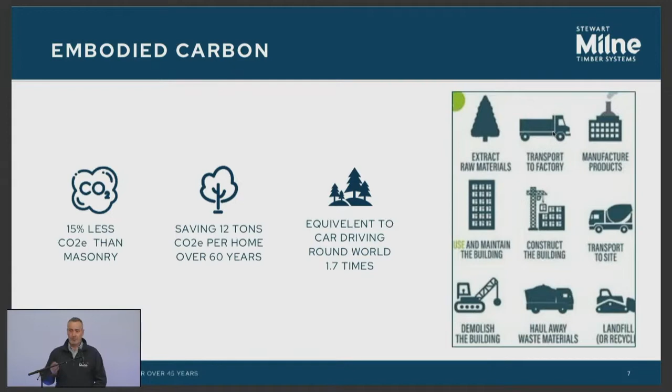Now, we're going to build 300,000 houses in the UK. Currently, the timber frame market is about 60,000 homes. If that doubles to 120,000 homes, that's 120,000 times 1.7 times around the world of carbon saving into the atmosphere. That's a great story. And businesses are looking for solutions in terms of how they can actually reduce their carbon footprint.

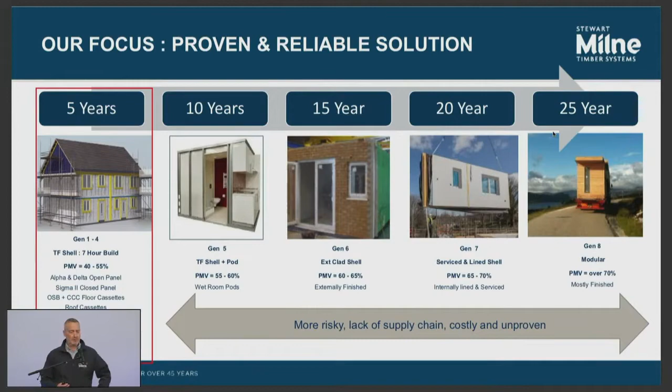Our focus has been on the structural shell. We're a panelised timber frame supplier. We do not produce modular systems like the one on display here. We are panelised MMC systems. Our focus is on building a structural shell, wind and watertight, insulated, windows fitted, pre-finished floor, roof on the deck, no scaffolding, roof tiled in less than 7 hours. So the structural shell, complete, wind and watertight in a day.

That then allows the follow-on trades to come in, fit the kitchen, fit the bathrooms, complete the home, and then clad the building around the outside with traditional materials, be that stone, block, render or brickwork. You can get a mortgage, NHBC love us, banks love us, lenders love us, because you can get a mortgage. It's a sustainable, renewable material, but also proven with a heritage of acceptability in the marketplace. It's on the cusp of being a mainstream solution.

Yes, there's things we are looking to do in the future. So working with AMCH and the Innovation Centre here, looking to think about pod and panels. So if we dropped in a bathroom pod as part of the shell process, if we did other things as part of the build, maybe putting a facade in the factory, for example, we could increase the amount of off-site manufacturing to a position maybe in 5, 10, 20, 30 years, where the majority of the home is done in the factory. But if you want a here and now solution for reducing your carbon footprint and delivering a viable, cost-effective, mainstream, acceptable way, timber frame is the way to go.

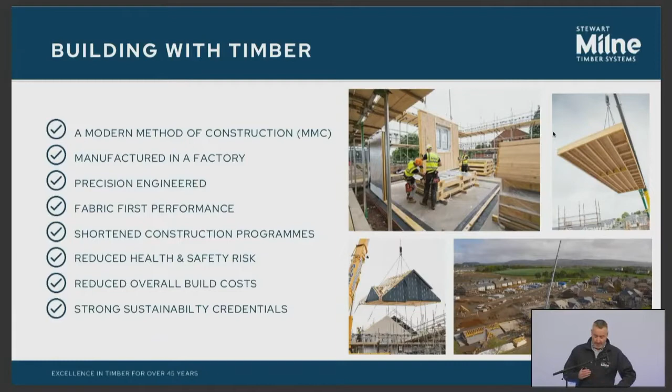And also, if you look forward to what the government's doing, the next slide, we see in England a move towards more modern methods of construction. Homes England fund all affordable homes in England currently. Huge landowner, huge funder. They've now encouraged, as part of their funding criteria, that all funding released in England for affordable housing requires a 25% MMC requirement. MMC is defined as 7 categories. Category 2 is panelised timber frame, and it has to have a pre-manufactured value of 55%. Pre-manufactured means the volume of work done in the factory versus the volume of work done on site. That's driving the market towards adopting these systems.

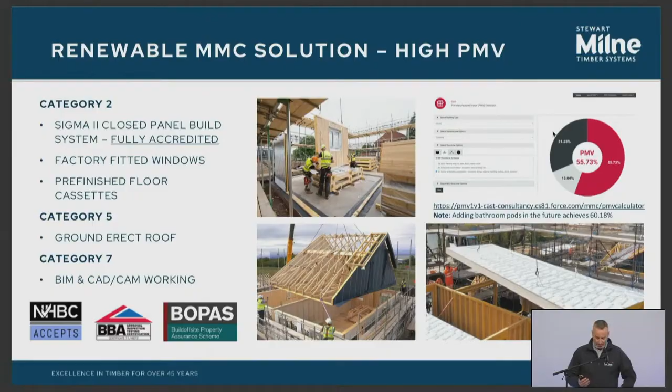I would call on the Scottish Government to think about doing something similar. Even though we currently use 85% timber frame, we need to develop the next generation timber frame, including closed panels, other incremental improvements that we can make from an indigenous supply chain that can service our existing marketplace. And also, these systems that we're developing, closed panel technology that is the sort of mainstay of achieving 55%, needs to be certified and approved.

The question was asked earlier today. We've got BOPAS, we've had it for 5 years. We've got BBA certification, we've got NHBC accepts approval in our systems. We can get a mortgage, you can get insurance. We've got durability assessments for at least 60 years. Everything's designed for a minimum design life of 60 years. So that means that banks can support us, mortgages can be given, insurance can be provided on the homes that we're producing. And that de-risks any concerns that a developer or a housing association may have with their housing stock. It's really important we have these certification schemes in place and that people adopt them and use them.

PMV, the question was asked, pre-manufactured value. It's a new term. It's like all these things. But write it down, because I'm pretty sure people will start to get their head around what that actually means to them. And if you're a developer or if you're an affordable provider, whether you're a small SME or a large builder, you'll start to be asked questions about what your PMV score is for your development. And that's essentially a driver towards modern methods off-site construction systems. England have started that journey by specifying a metric. Scotland have yet to do so, but are likely to do so, I believe.

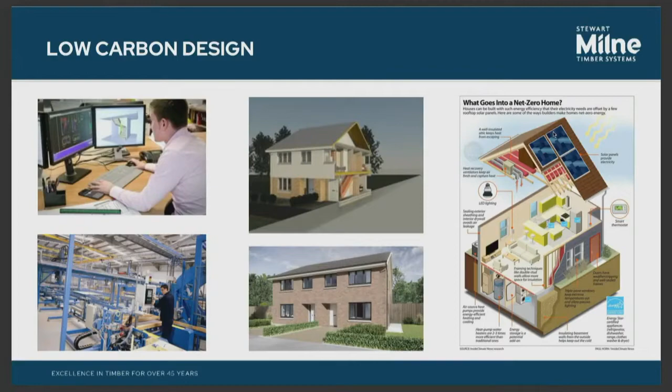So things like Revit technology that's from Autodesk, to actually use that and to then create that information to then flow into the factories so that our factories can be efficient to produce product, and flow into the building site so that the guys on the site have got information at the point of use, makes their life easy to assemble the homes.

And also embracing manufacturing. Timber frame is a low energy manufacturing system. It does not use energy. We're about to design some PV arrays in our factory in Witney in Oxfordshire, a 3,000 unit PV array, which will actually mean we produce more power than we consume. We will be self-sufficient as a factory.

So all our equipment, all our forklifts, and all our potential customers and our staff coming to work have the ability to potentially charge our car and actually run our equipment. We can use our waste heat, our waste timbers, to create heat and then decarbonise, obviously, the outputs, the emissions, to create heat as well. Or we can actually, in the future, look to battery storage.

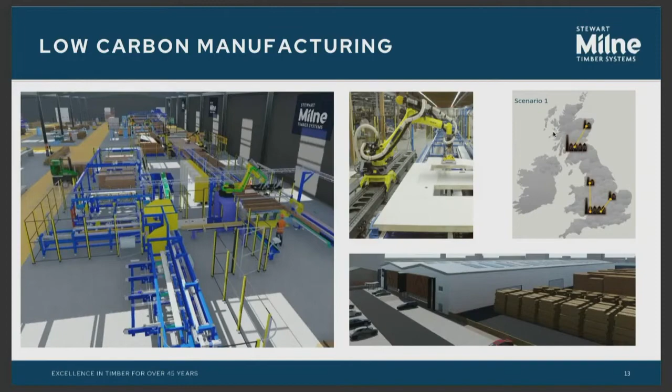We are creating high-value jobs that will ensure we've got a more diverse, younger workforce who want to come and work with us. We can't have factories where we're relying on people lifting heavy things and assembling heavy things. We need to move towards how the car industry have operated. We're on that journey. That technology could be deployed into Scotland in due course when the PMV number increases to a more developed product. We're developing that technology. That is world leading.

And the last thing we've done is create digital twins. So we think a hub and spoke factory design is a good system so that local jobs can be created. We've developed a hub, which is a large manual or automated hub that produces 5,000 homes, or a spoke, which is a smaller 2,500 unit manually orientated spoke.

Done this with the Manufacturing Technology Centre, working with the Construction Scotland Innovation Centre and AMCH to create digital twins of future factories that we can deploy. So if we've got a pipeline of work in a certain location, we can actually have a pop-up factory to make product close to that site.

But it's also about the construction as well. So, reducing emissions. If we do more in the factory, so insulate things, put the window in, have pre-finished floors, we don't need so many trucks coming to our site. We don't need so many forklifts running about our sites. We're a safer way to build. We're not working at height. We've got less trips and falls. We've got less manual handling.

What we're seeing in the mainstream, and the opportunity, is that in blockwork construction, brick and block, you rely on a bricklayer. There ain't many bricklayers going around. They're actually a depleting resource over time. They're an aging workforce that's reducing. We need new ways to do it. So timber frame allows us to do that by taking that element off it.

We still need a bricklayer to then put the bricks round about it. So he's more efficient. He can do 5 or 6 houses a week rather than 3 or 4. He's not having to lift heavy steel lintels or lift heavy block lintels because the shell's there. He's building to a template.

So in terms of getting more people and de-skilling the process, it's about using the skills we've got, extending the shelf life of the workforce we've got, and actually encouraging new people into it where they don't have to work on a muddy field as much because half the building is already built for them.

So our final roadmap is about low carbon homes and designing those. So through our project, AIMCH, working with our partners, we've developed a pre-configured book of affordable homes that are net zero carbon, 18 house types, all designed to Housing for Varying Needs, or NDSS standards in England. Fabric first, heat pump ready, with a low U-value external wall solution, 55% PMV as minimum, all type approved, and

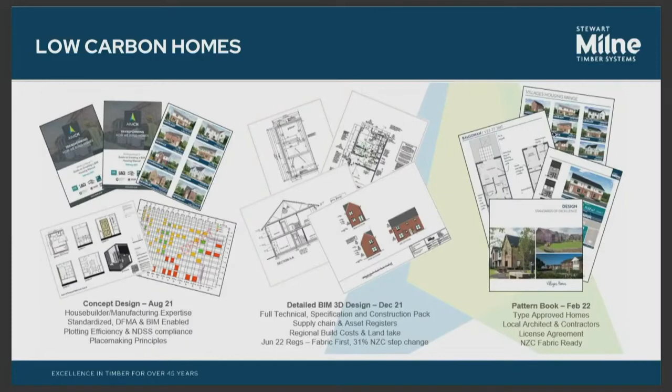free to use. So an SME who doesn't have the skills, who doesn't have the technical people to help them, can actually come and just use, under a license agreement, our range of house types, with a regional architect who can then build them, whether it's in rural Highlands of Scotland or whether it's in the outskirts of London. Configure them together, elevate them to suit the materials in that local vernacular.

We've got a placemaking manual that goes with it to ensure that the places we're building are fit for purpose, 3 elevational styles, and are already type approved by NHBC, endorsed by, hopefully, Homes England in terms of funding, and potentially supported by Lloyds Banking Group in terms of development finance and mortgage finance.

Those are the type of solutions, pattern book, standardisation, DFMA, that make our life a lot easier. Makes the developer's life a lot easier where they've got an off-the-shelf pre-configured solution. So first to market, spring next year, we'll have a solution for those who'd be interested, where they actually can just take the whole house solution from us, because we are a developer as well as a supplier.

And finally, just to talk about our ambitions as a developer, we are currently building the largest residential development in Scotland at Countesswells on the outskirts of Aberdeen. It's a 3,500 unit development with mixed use, education, community, food production, retail, and the largest public park built in Scotland in the last 100 years. A huge degree of biodiversity involved. We call it a 20-minute neighbourhood to get connectivity to wider connections within the Aberdeen area. And we believe this can be really a bedrock for the future model for net zero carbon living.

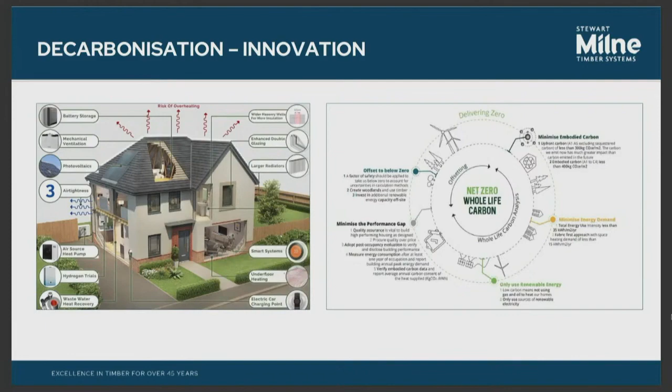And the key thing with that is to make sure that we don't create unintended consequences. We don't want to build homes that are not fit for purpose in 10 years' time, that are going to be overheating, that are going to be pulled down because they're not durable enough, etc. They create health and well-being issues because they've not been thought through. So we have to go through this process. So innovation is fundamental. And with our work at Countesswells and maybe working with the Innovation Centre and others, we'd like to do more.

So from our point of view, to finish off, our conclusion as a developer and a supplier who wants to mainstream the use of timber for at least 1 in 2 homes in the UK: timber is the only real, viable, doable, reliable, proven solution at this point in time. And we believe using timber as a renewable material will ensure that the homes and the places we create for our people and our planet will be loved by everyone.